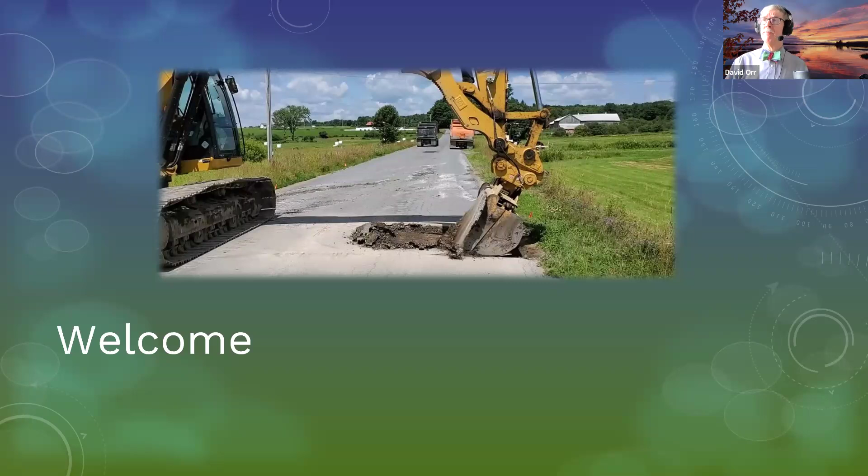Okay. Now, let's do a little bit of a welcome. This helps me see who's on the call and allows me to make some minor changes based on what you tell me. So we're going to be using pollev.com/DavidOrrPE. So the first one I like to know is, who do you work for? Town, county, city or village, state or federal, tribal, an MPO, an authority like the Thruway Authority. You're a consulting engineer, you're a contractor, or you're just working for a living. So today we actually have a nice variety. We have state and fed, cities and villages, towns, counties, contractor even. Good variety today. And quite a few who are working for a living. Okay.

What do you do for those agencies? Are you an administrator? Are you the deputy or highway superintendent or the commissioner? In other words, you're supposed to be in charge. Are you the engineer? You in the field crew? You're a board member? Or none of the above. If you do that, throw that into the Q&A. And by the way, you can access the poll via the web. You don't have to have the app on your phone. But again, you can always put the answers in there. So we have mostly engineers. I'm not surprised by that, but quite a variety of folks for the remainder. Okay.

And again, if you ever do a none of the above, put in the Q&A what the none of the above stands for. How long have you been in your current position? Is it less than a year, all the way up to 20 plus years, just to get a sense? Oh, we got a few who've only been in their jobs for just under 3 months. That's interesting. Okay. Wow, good variety.

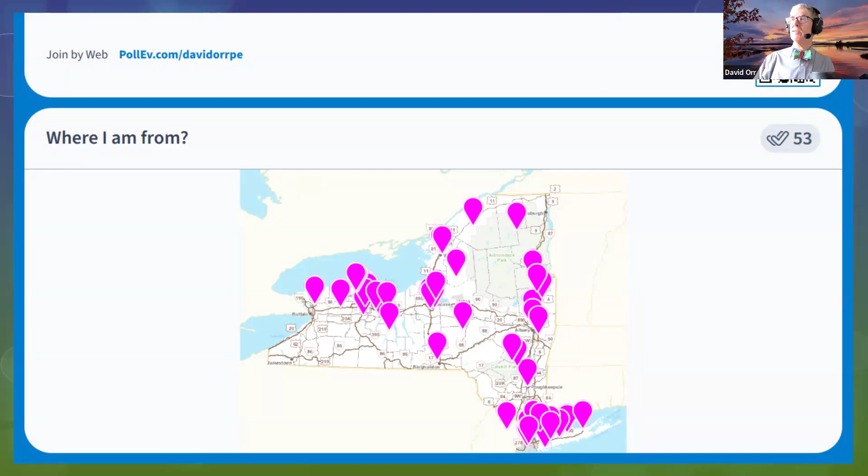Okay, so let's answer a question. We've asked this question before, but it's always a useful one. Why do we build roads and streets? I'm just curious. Why do you think we build roads and streets? We can talk about this for lots of classes, including safety classes that you put in.

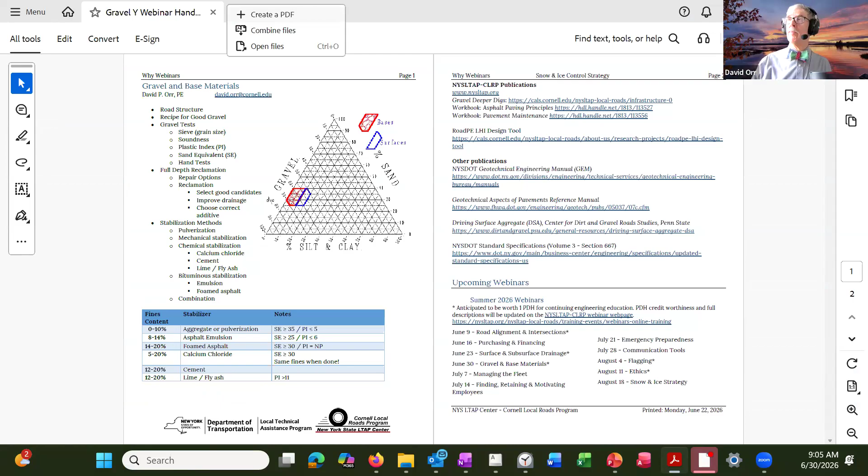Okay, so why we build roads and streets, I think we can all agree upon. But really, when we think about it, roads and streets, you have to think about the traffic on the road, the structure of the road, and the geometry. Now, we're not going to talk much about the geometric alignment today. We might talk a little bit about width, but mainly we're going to be talking about the traffic and the structure that goes on that roadway.

Because, as one of our former circuit riders at Cornell used to say, you need to build the road to handle the load. And a lot of that comes from the material that we are talking about today, base and gravel materials, because roads actually do have a structure to them, ranging from the surface all the way down to the native material that we build on, the subgrade, i.e. the material after we've stripped off the organics.

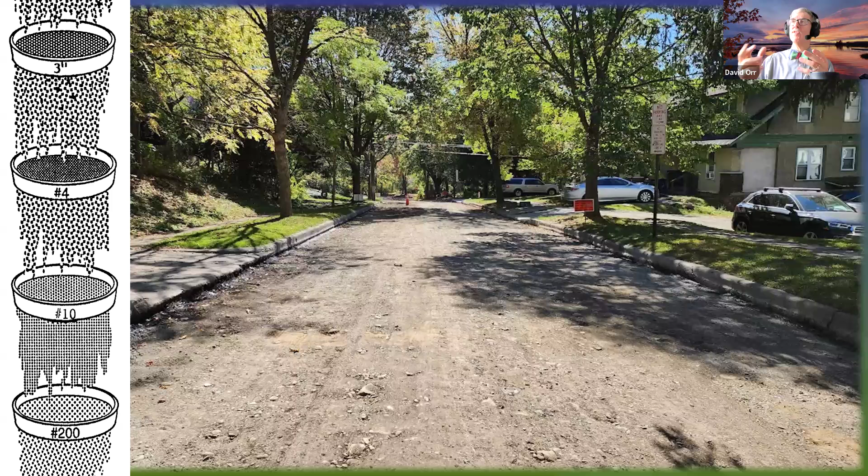Okay? And there are different definitions for what people use. I want to make sure we're all on the same page. So let me ask you this. This is a picture here in the city of Ithaca where they had milled off the surface. They were getting ready to repave after they had ripped off all of the asphalt. There's no asphalt left. If you've done that on your roadway, you've got this material exposed. What do you call that material? What is the name you use for the unbound material under the surface?

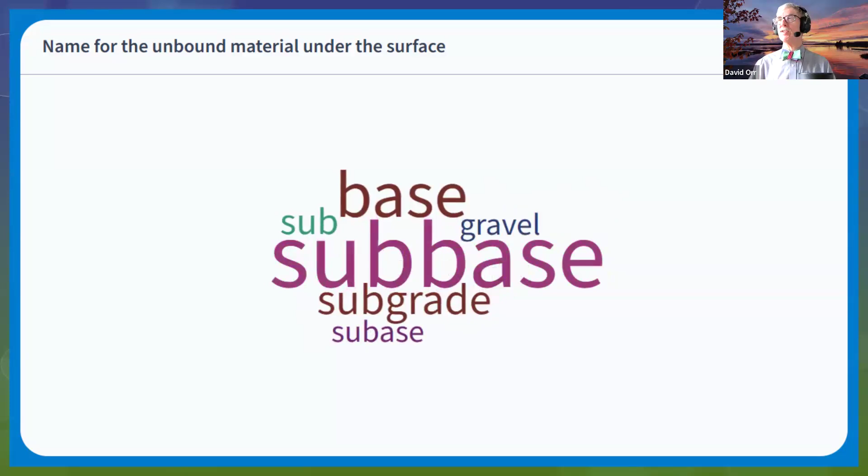Okay. So let's see. Sub-base. Base. Depends how thick your road is, what you call that. It might be a base, it might be a sub-base. Some bases are bound materials. Okay. Anybody use other terms that are more specific? I can tell I'm talking with more engineers because of the answers you're giving. Some people say the term gravel. You might hear the term crusher run, bank material, lots of different words people use for it.

Okay. Now, for some people, the surface of the roadway is unpaved. So I told you I'm going to ask you to raise your hand. Raise your hand if you are with an agency and you have unpaved roadways, gravel or earth surfaces, or if you're an engineering firm and you work with those kind of roadways. Just trying to get a sense of how many of you deal with unpaved roadways on a regular basis. I'm guessing it's not going to be a lot today, but that's okay.

Okay. Now, we're going to come back to this unpaved road here in a little bit because that's actually pretty important. But let's remind ourselves of what we're trying to do when we build a roadway. Vehicle comes along, truck's doing most of the damage. We know about that. But we're trying to spread the load out so we don't overstress the subgrade. And so we put a pavement on top. Okay? And that spreading the load out means the subgrade is protected, but the pavement then has to pick up some of the forces from the tire.

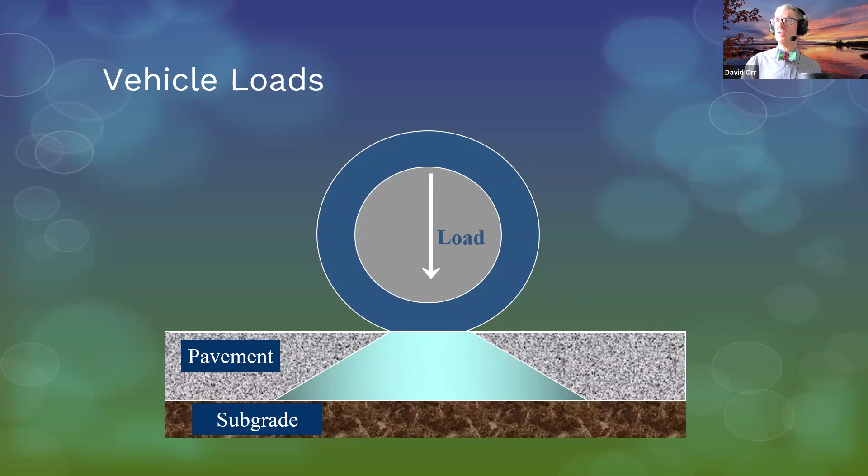And what we really look at in a lot of cases is the deflection of the roadway as it bends, goes up and down as the loads go by. Okay? Now I can illustrate this better with a video. This is video shot by the U.S. Forest Service. You can actually see the pavement move. Watch the two green dots. It makes it a little easier to see.

And these are a road designed to fail. This was done by the U.S. Forest Service, as I said. And you can see high water table, a little dirty in terms of the material, a very thin surface. And so it only takes 81 passes of these fully loaded dual tandem trucks to destroy this pavement. Now, if this was your own road, you'd be having a bad day. In this case, it was actually designed well because they wanted it to fail as part of a research project, looking at the effects of materials and water and all that fun stuff.

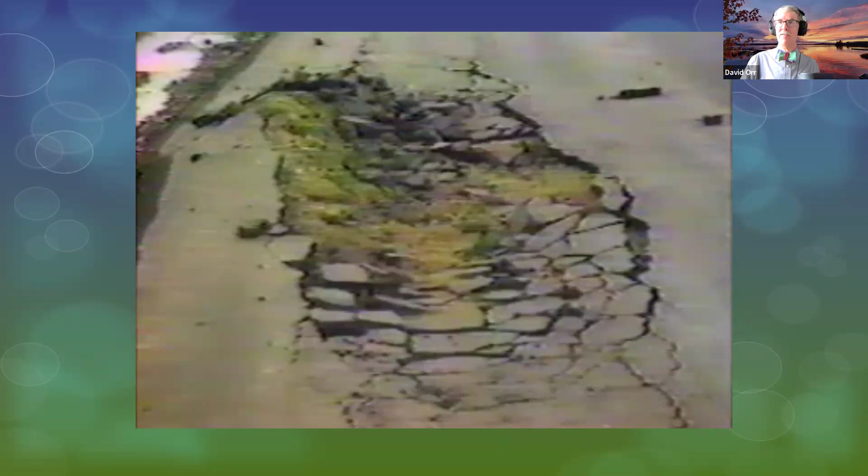But this is why different people use different terms. If you're on a state highway, you're going to have a series of layers. You're going to have a surface layer, which is some kind of Superpave or its kin, and all that fun stuff that are out there, and probably warm mix these days. You're going to call that surface material. You might have a binder layer. You might have a base layer of asphalt, but it's all bound materials before you get to a subbase, which is unbound. Okay. And that subbase is relatively thick. We'll talk about thicknesses in a little bit. And this is the roadway over the top of the subgrade.

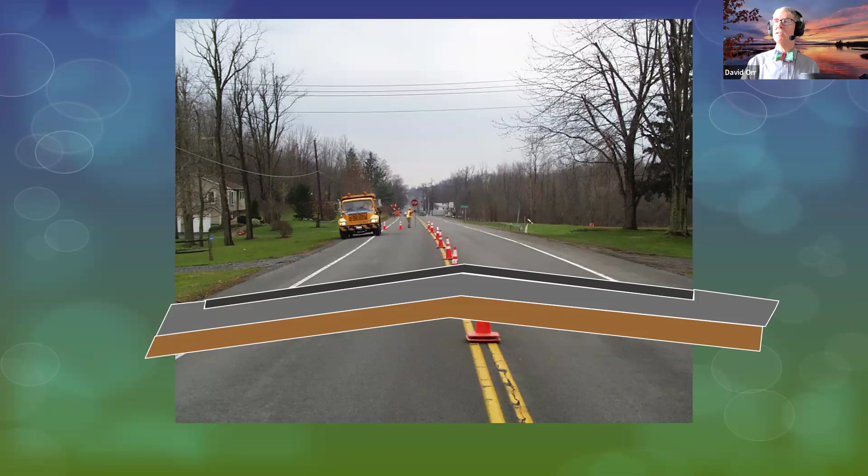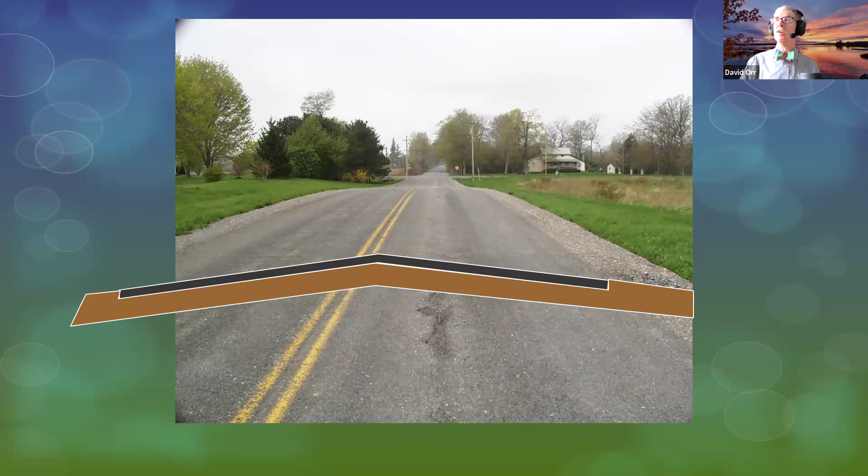If you're on a collector road, maybe a county road is a common example of that. In this case, you might have an asphalt layer or two over a base layer, which is unbound. Okay. So in that particular case, the base is actually more critical for the structure, because it's doing more of the structural capacity work. And of course, if you're on a town road, it might just have a chip seal on it. And that chip seal might have been placed on an old gravel road. It might have been placed as part of an upgrade, but you can actually have a pretty good road with just a chip sealed surface.

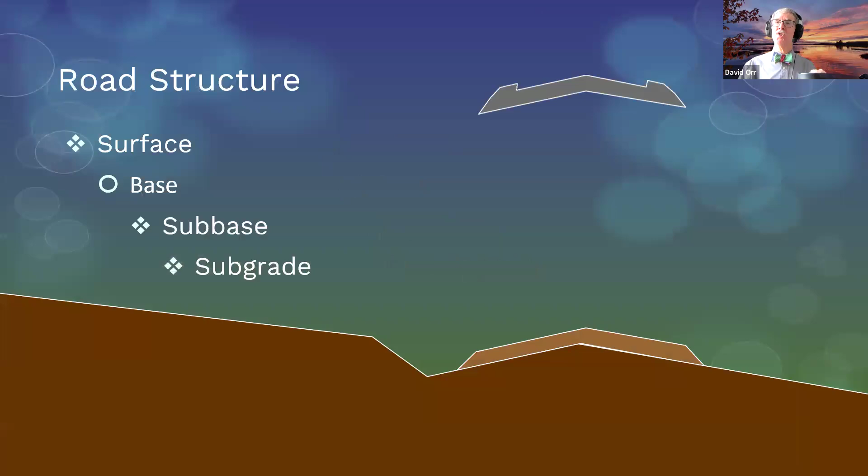And of course, a lot of roads, almost everything but the interstate system, started as unpaved outside of cities. And so in that case, you've just got a gravel surface. And the quality of that gravel, obviously, as you get thinner and thinner surfaces, becomes more and more critical. So when we're looking at that road structure, what we're going to be talking about today is the unbound layer and why that's such a critical layer when it comes to having our roadways last as long as possible. It might be a base. It could even be a surface. A lot of cases, it's a subbase, but we're talking about that base layer that's over the subgrade.

Now, again, this helps me, but also gets you thinking a little bit, I hope. If I was asking you for your agency, or if you're from a consulting firm, the kind of roads you work on the most, what would you say is the most common asphalt thickness? Unpaved roads, less than 2 inches, 2 to 4 inches, 4 to 6 inches, 6 to 8, or greater than 8 inches.

Okay, let's see what y'all come up with here. And I'll come get my mouse and scroll down so we can see. And I didn't think we have many unpaved. Okay. So 2 to 4 is the most common. This is the center of our curve, but quite a few of you have 8 or more inches. And what that means is that asphalt's doing a lot of the work.

Okay. Now, if you've got a paved roadway, okay, this is important, paved. So if you look at the bottom left, you'll see the word paved. If you have a paved roadway, what is the thickness of the gravel layer? Could be a base, it could be a subbase, but this is above the subgrade. This is material that is brought in to make that road stronger. Is it 0 to 6, 6 to 12, 12 to 18, 18 to 24, or greater than 24 inches?

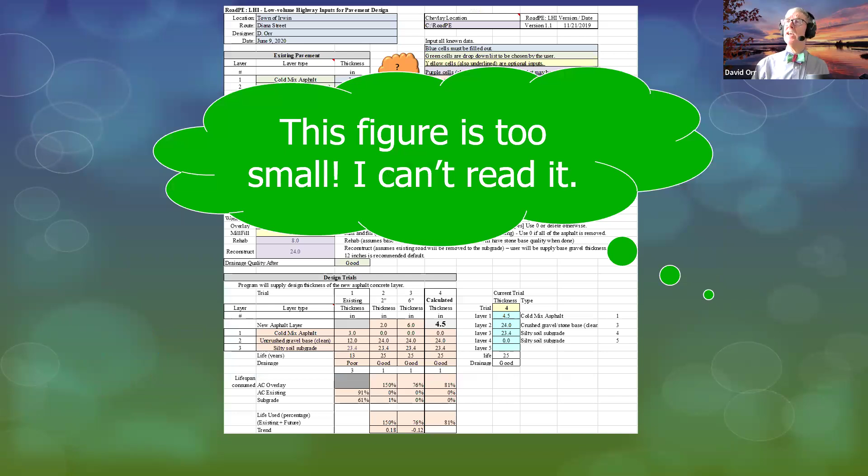We do have a tool available. We call it Road PE LHI. The LHI, I set the acronym to stand for Low Volume Highway Inputs. It's actually the initials of our former director, Lynn Howard Irwin. But if you're interested, it's available. It uses a spreadsheet, which means it's probably not as fast as it could be. And I know you're going, the figure's too small, I can't read it. That's okay. I just want you to see there, if you're interested, there's a tool to do modern mechanistic design for pavements that involves a spreadsheet that works up to about 2,000 vehicles a day. It's not really going to work on the higher volume, but you can run the numbers to get you in the ballpark.

And the idea behind any pavement design is you first have to check the existing pavement. Whether you're using AASHTO 93, you're using the tool we put together, or using the modern AASHTO ME design, you really have to check the existing. And someone says, is it in our asset management program? It's not. It's a separate link. It's in the handout. Could we integrate them? We'd have to think about how that might work. But the idea is you got to check the existing.

Because I've seen people, they run a design and they go, oh, we got plenty of structure, not realizing they've already lost a lot of the life of the pavement because pavements fail in fatigue. Then you run your design using whatever's there and decide, hey, do I have to start over? Can I just recycle? Do I have to do a rehab or what do I have to do? And of course, any tool you use should allow you to tweak, just do a single check, and any good tool should have that. If it doesn't, you might want to think about looking at another tool.

And we don't do enough design. We should do more. But if you think about it, you probably should have a tool that can do a design about the time it takes you to wander over, get your coffee cup, and come back. And that's a good rule of thumb. If it's longer than that, it's probably something you're not going to do much. But we do need to design our pavements to handle the loads because there is a road structure involved.

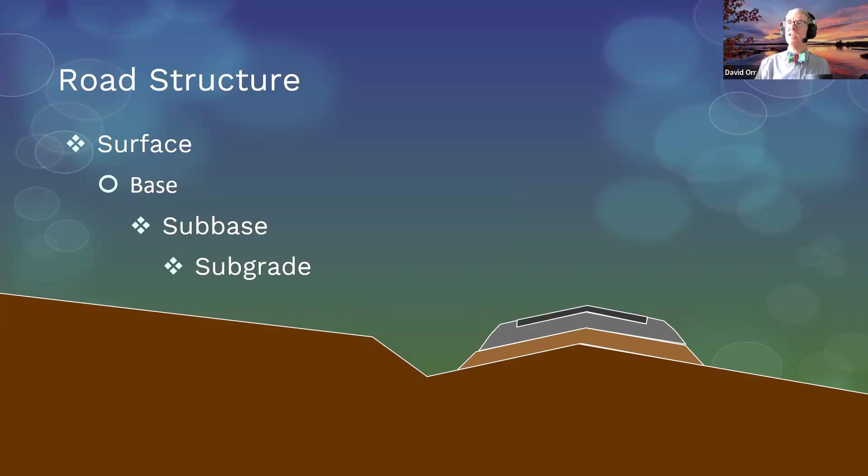Okay. But what I want to make sure we're on the same page on is how do we get that good gravel layer, that subbase, base, whatever we call it. We want to have good gravel. And it can make a huge difference in the life of our roadway if we've got good gravel. You can run the numbers, but it could be a factor of 2 in terms of lifespan by improving the drainage. And part of that means having good gravel. So what's the recipe for good gravel? Well, you need lots of drainage. You've got to be able to drain the material. Okay? You've got to have the correct mix of gravel, and you're going to have to do some testing, whether you like it or not. Okay?

Now, I've got a question over in the Q&A. I like to see questions. It says, how is the issue of very infrequent heavy trucks addressed? A new development residential street only accommodates heavy dump trucks during construction, but not after build-out of the development.

The way you do that is you account for it in a short-term design, because the cool thing is for pavement design, they fail in fatigue, and you can actually sum up the percentage of pavement loss during the development. There's actually a way to do that if you're interested.

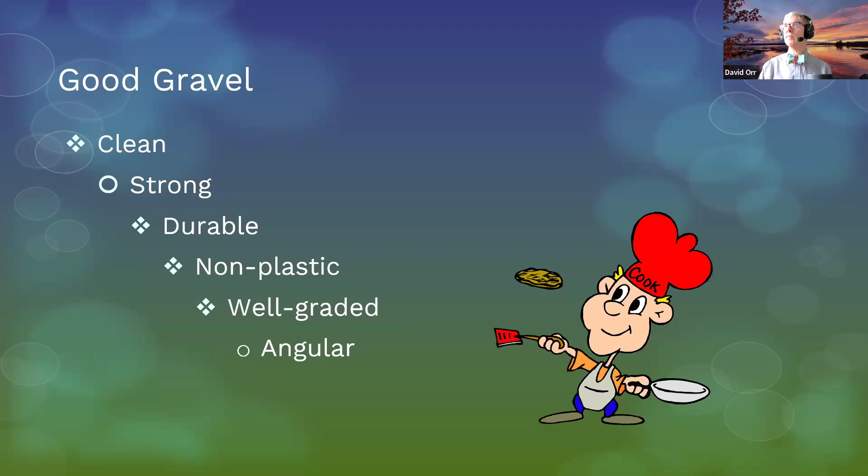And I put that last mainly because if you gave me all of the others, but I couldn't get angular for a base gravel that's under asphalt, I'll live without an angular material. I can make it work as long as it's not just completely rounded. But if I've got great angular material that's dirty, it doesn't matter. It's still going to have problems. So let's go through the more critical ones here and talk about what that means.

So what do I mean by clean? Well, gravel, of course, or base or sub-base, whatever you want to call it, is actually a mixture of particles of different sizes. The gravel-sized particles, the larger things, is where the strength comes from. That's where you're going to have your strength of the roadway. It's got to be durable and handle everything. Then you're going to have some sand in the mix. That sand fills in the voids, still pretty good for drainage. And that's all you need. You don't need anything else.

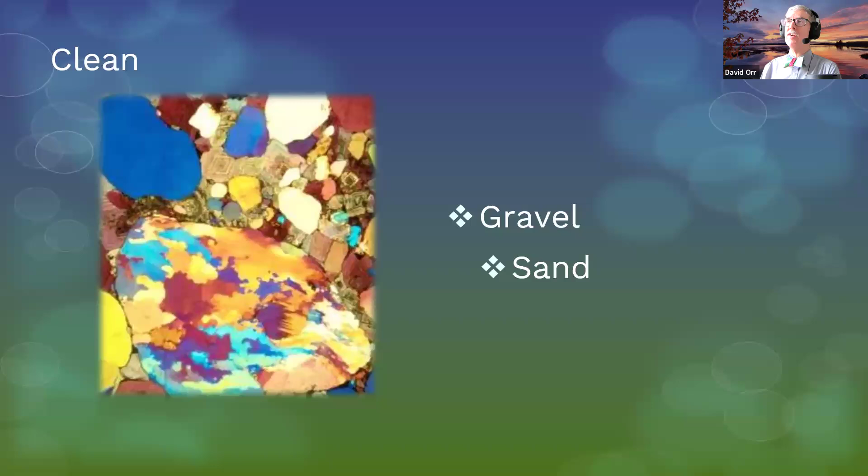But the reality is, since we're using native materials in the area mostly, you're going to have some fines, like it or not, some silt and clay. Okay? So you're going to have some fines. So what I'm going to show you here is a chart that we've shared. It's on the handout in a different color schema. And what essentially we did, long before I was here, our original director, Jim Spencer, got samples of gravel from every county in New York State.

So glacial tills mostly. Not completely, but mostly. And found good gravels and bad gravels, started looking at the features and what makes good gravel, what makes poor gravel. And then over the years, Lynn Irwin tweaked it a little bit. I've done some tweaking. We've looked at other specs from other places like the Pennsylvania Dirt and Gravel Roads Group and other LTAP centers and other standards like the U.S. Forest Service.

And what we found pretty consistently is you need about 50 to 70% gravel. That's where the strength comes from. That's the durability. And in terms of the mix of sizes that you put in, you've got to have that dense gradation to it. There's a little bit more, but in 1 hour, we can only sort of give you the range.

There has to be a range of gravel sizes, up to no more than 3 inches, maybe even a little smaller on a surface gravel, down to sand size, that 1/4 inch cutoff point. Sand, you need about 25 to 40% sand size to fill in the voids, help it pack, and it's still pretty good from a drainage standpoint. That's true wherever it is in the pavement, okay? If you've got too much gravel, it's not as stable. If you have too much sand, you don't have enough strength. So you need that good mix.

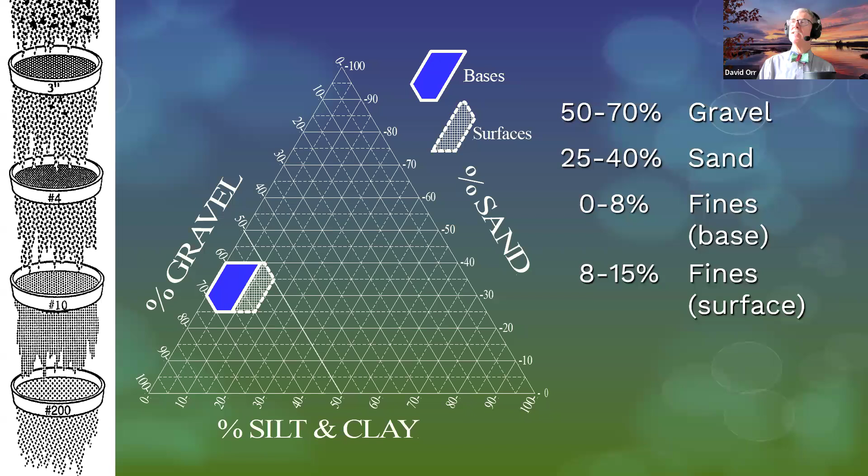Now, if your roadway looks like this, you probably did pretty good. Your base is probably pretty clean if you've got good drainage. But the problem is, if you just chip seal or pave over a gravel surface, it's probably in that hatched zone. It probably has, just by time and default and what we know works, material that's got a fines content that's a little bit too high for having a chip seal or pavement on it. And what happens is water that used to evaporate builds up in spring thaw periods, and we get problems.

Okay, so here was a gravel road. It had been gravel for a long time. It got chip sealed and it blew itself apart. Not because of the ditch, not because of the slope, because of the quality of the gravel. The gravel, when it was tested, had a fines content of 13%. Well, at 13%, it held too much water. As a gravel surface, fairly low traffic, but you chip seal it, you don't clean that gravel up first, you're going to have problems.

And by the way, if you're wondering why the 8%, what we found is up to about 8%, especially with silts, which are really common in New York State, is not too weak in the spring and it doesn't have frost effects too much. This is a good example of what happens in the winter. As it freezes, if it's got a lot of silt and there's water available, the roadway will heave. Because you know and I know the road stripe was not placed with a dip already in it. Probably paved pretty smooth in the summer, but in the winter, you can find the culvert, it doesn't move.

Anything above about 8%, we start to see frost issues, which is one of the reasons, by the way, we are concerned when people are using what everybody likes to use, item 4, which technically is type 4 from a state spec. That's actually a sub-base material. But if it's close to the surface, those frost issues can get you in big trouble. So we really want to have relatively clean material if we can.

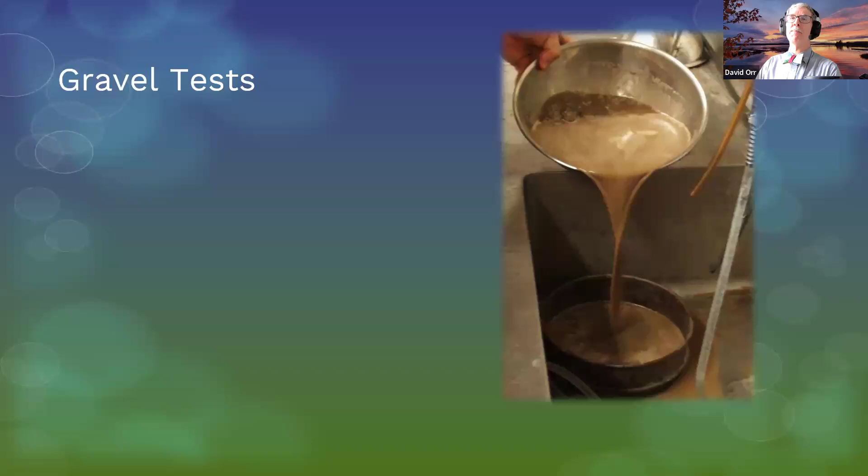Here's a picture of the wash portion of a sieve test, which breaks down the particle sizes. Okay, that's a critical test. We all did that for those of us who went to college and took geotechnical engineering. You all remember your soils class and you did a sieve test. The wash is really important to get that number right.

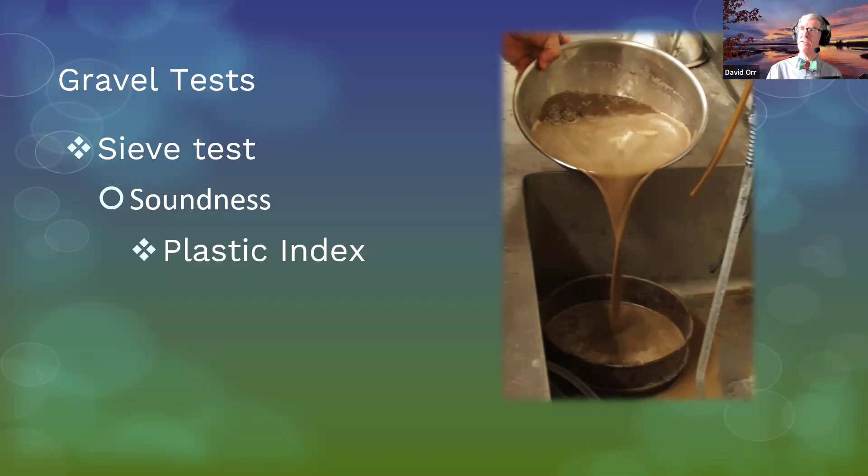Another test we do is called soundness. Okay, and I'll come back and talk about soundness in a little bit more, but soundness means how does it handle freezing and thawing and freezing and thawing? Okay. The plastic index, and again, we'll talk about this one a little bit more, and that's how plastic this material is. How does it behave in the presence of water? Okay. And there's a test I want to talk about called the sand equivalent, and that's related to the plastic index, and we'll talk about that more.

There are other tests, and if we had a whole day, we might talk about other tests, like there's a test to check for durability called the LA Rattler test, where you take the material and you put it in a big dryer and you spin it around with steel balls and see how it breaks down. And that's an important test to do, but you probably know most of the good materials, the things that are going to hold up under traffic. And there's some hand tests you can do to help get you started.

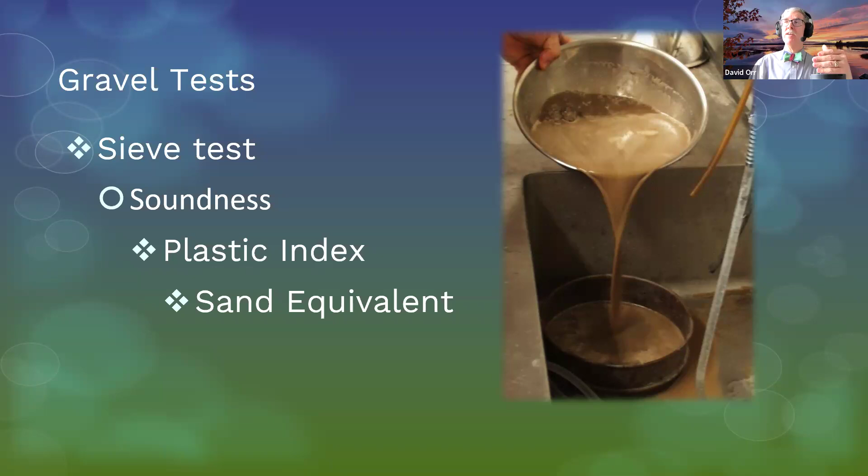But let's look at these four. Actually, we're going to look at three of them. The sieve test is one we all should be doing. We should do that on all of our aggregates, whether they're gravel, base, sub-base, or even asphalt and concrete. We should be doing sieve tests.

What is the soundness test? Well, if you've got a material that is not sound, what happens is it freezes and thaws, water gets in, and it breaks it apart. And that could be because it's a weak stone, like a shale. Okay. It could also be because it's a conglomerate. It's a material that's only held together by some light cementation. Okay. And it looks okay to the eye and it seems to do okay. But then when it freezes and thaws, it breaks apart. The Catskills are filled with materials with poor soundness.

And you could do this with water baths, where you put the rocks in the water, take them out, freeze them, thaw them, put them back in the water, back and forth. It's expensive, it takes longer, takes more energy. And so what they've done is they said, well, we can make crystals. We can make crystals relatively cheaply. And we'll do that with Epsom salts. It's called magnesium sulfate, but the same Epsom salts that your grandmother uses on her feet is the same stuff.

We take a saturated bath of Epsom salts, we drop the rocks into it, let it soak, bring it out, and then heat it up. And as you heat it up, the crystals form, the same crystals in the other direction when you freeze it and make it colder. And you'll get a breakdown of the rocks. And it's got to be able to handle a certain number of cycles depending where it is in the pavement. And if it breaks down too much, it's not sound.

And that's a test that you should be testing. If you're buying state-approved materials, they're doing that test for you. Okay? The other one is the plasticity index, how plastic it is.

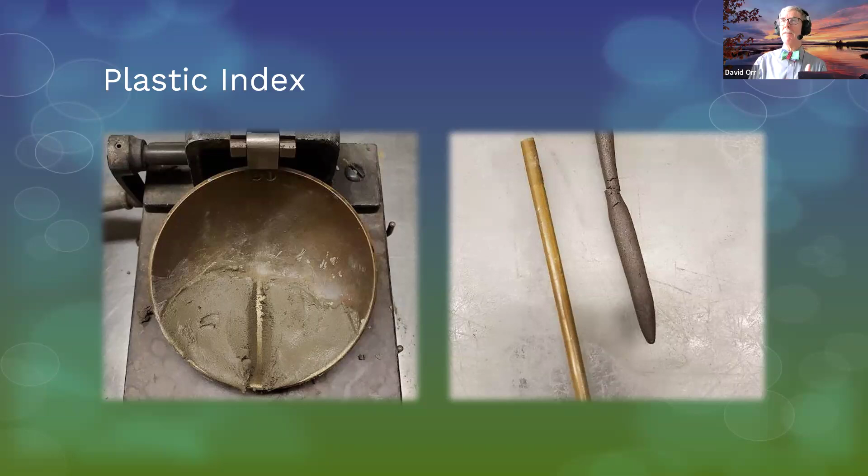But with clays, that range can be pretty broad. There are materials in Texas that have been tested and have a moisture content range for when they're plastic of upwards of 400%. And boy, they hold a lot of water. I'm glad we don't have to deal with those kind of materials in New York. And if you're from Texas, you do know about expansive clays. But the plastic index is a great test for when you've got a lot of clays, especially what are called heavy clays.

But I want to introduce you to another test if you don't know about it called the sand equivalent. Do me a favor, raise your hand if you've heard of the sand equivalent test. Let's see how many of you have heard of it. If you ever dealt with Superpave asphalt, when it first came out especially, the sand equivalent was actually one of the tests they did on the aggregate. Okay, so just a few of you. It's a pretty cool test. It's actually one we recommend, and we'll talk about why in just a little bit. It's essentially an alternative to the plastic index.

What you do is you take material in a specific solution that's calcium chloride, which causes it to flocculate, and some glycerin, and you essentially shake the heck out of it. It's like the old mason jar test, where you put the gravel in a mason jar, shake it with some water and let it sit on a shelf overnight. This is a scientific version of that. You shake the stuff that is smaller than the number 4 sieve, i.e. the sand size stuff, let it settle out for about 20 minutes, and measure the height of the column.

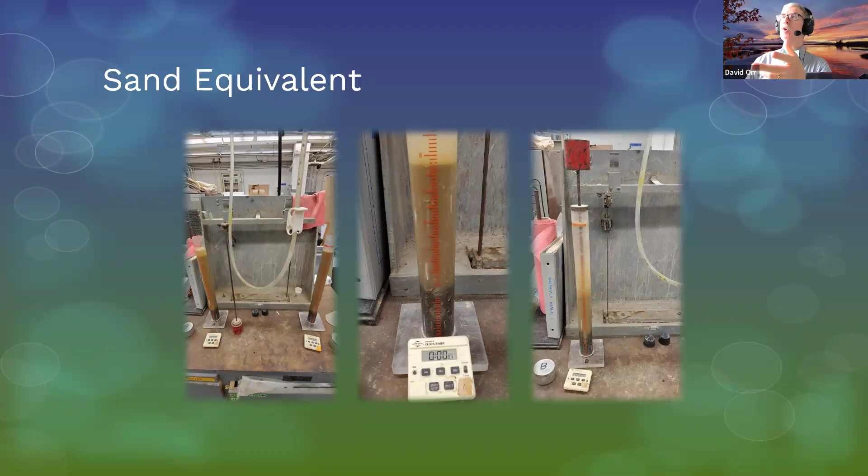Anything that's sand sized and larger is going to fall out immediately. Anything finer than that, the silts and the clays, are going to slowly settle. Timing matters; you measure the height of the column after 20 minutes of settling. What you get is a ratio of the total height of the column to the portion that will support weight. You actually put a weight on it. So you take your clay reading and your sand reading, the part that will support weight, and do a ratio with the sand on top: sand over clay. That gives you your sand equivalent.

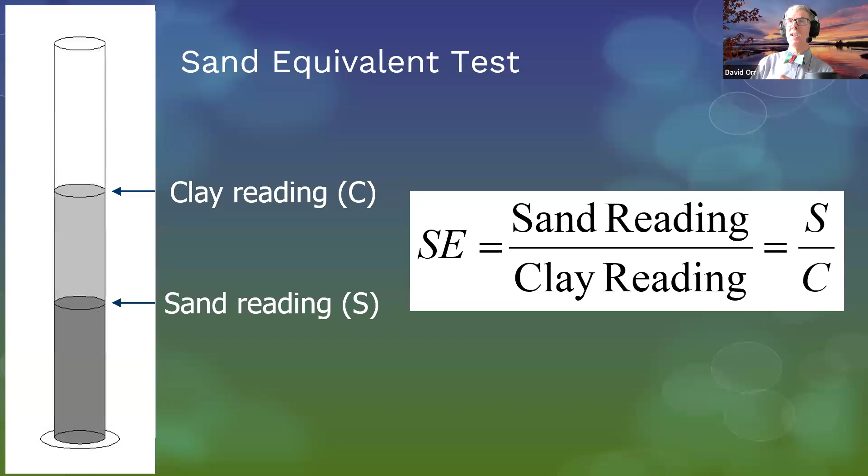So the sand equivalent reading comes about by doing this test. It takes about 40 minutes total. You can do it in the lab and get pretty good results within a couple of points. So if I get a clay reading of 7.7 and a sand reading of 3.2, what's the ratio? Get your little calculators out. I know, I'm going to make you do math. What is 3.2 divided by 7.7?

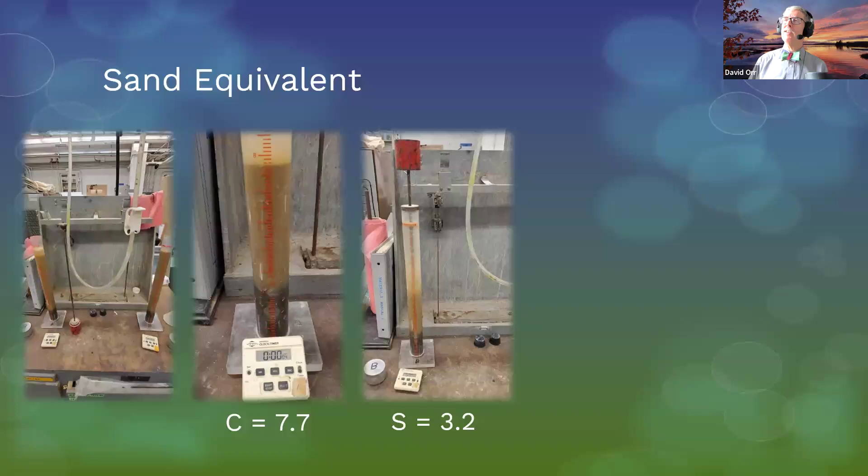Assume that somebody comes up with it in the Q&A. I'm like, he's making me do math. Oh no.

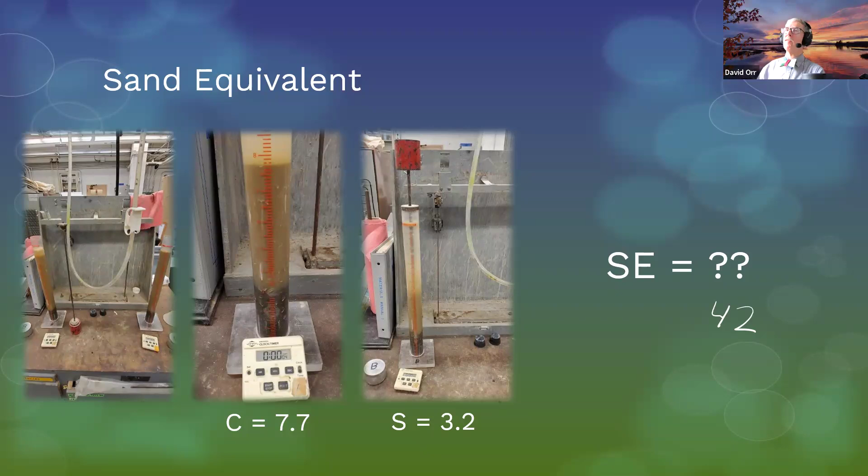.42. We typically report this as a percentage. Okay, so we multiply it by 100 and just take the rounded percentage. So it would actually get reported as 42. We round that number typically. Okay. So yeah, it's 42 for sand equivalent in this particular case.

What's good about this is why do we like this test? Well, let's look back at our base material. Okay, actually, let's look at the various layers in the pavement. We know the fines content for the surface layer, we'd like 8 to 15%. For the base layer, we'd like it even cleaner. If it's close to the surface, we'd like that fines down to 5%. And again, we'll allow up to about 8% if it's deep enough in the pavement.

The sand equivalent needs to be at least 35 to 40 for your base materials, because what that sand equivalent is measuring is the clay-like fraction that exists. Now, for a surface gravel, you don't want it too high because it's a measure of how does it behave? Does it hold enough water to help bind everything? Now, you could use plasticity instead, and the plasticity surprisingly matches up relatively close to the fines content, 0 to 5 and 0 to 8, until you start running a bunch of these tests.

And if you've run a bunch of plasticity tests, you and I all know that once you start getting plasticity down under 10, especially, it's really hard to tell them apart. It's a very nuanced test. I could get 10 of you into a lab and we test material that's got a plasticity of 6. Some of you will say it's non-plastic. Some of you will say it has a plasticity of 10. It'll be a wide range. For low plastic materials, the plastic index is not a very sensitive test.

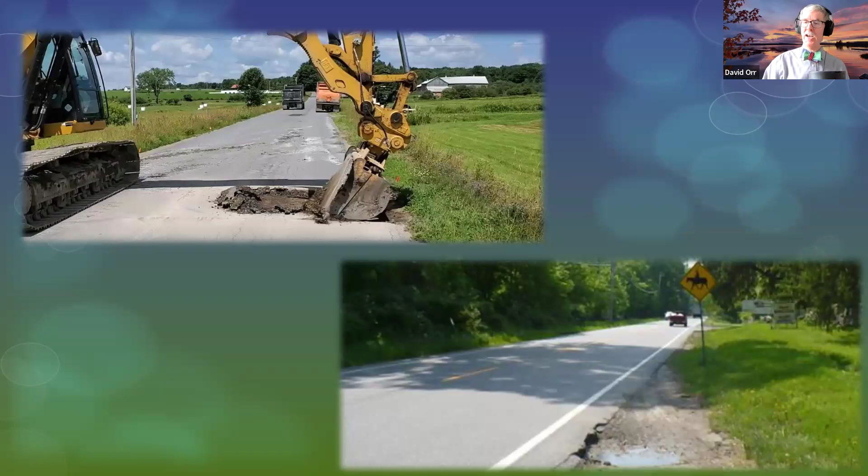And why do I think that's important? Well, we've done testing over the years. There's a site in Lewis County where we did some testing. In both of these sites, the materials are non-plastic. So by that test, you'd say, oh, these are great materials. Now, in the case of the one in Lewis County, the sand equivalent value was approximately 65. We took several samples and you get a range, but around 65. Pretty good stuff. It's material that's just below the sand size, pretty consistent, actually drains okay, pretty good sand equivalent.

Meanwhile, we did a site down in Westchester County near the John Jay Homestead. It's actually a pretty good place to tour if you ever get a chance. And in that particular case, the sand equivalent was around 8. Okay. Now, the idea is you want a test that tells you something. There's no point in doing a plasticity index test if it's not going to help you learn a little bit.

Now, there is a spec, spec 667, that has surface and base and sub-base gravels in it. It's a little tighter spec, though I did realize when we were setting things up, they've removed the sand equivalent portion from this spec. I need to work on getting that put back in because that sand equivalent is really important when you're talking about low plasticity materials as an alternative. And you may want to think about that.

When I was with Yates County before I came to Cornell, I was warned that somebody was sneaking organics into our pile of material. I caught them with the sand equivalent test over lunch. And we didn't have to pay for that gravel.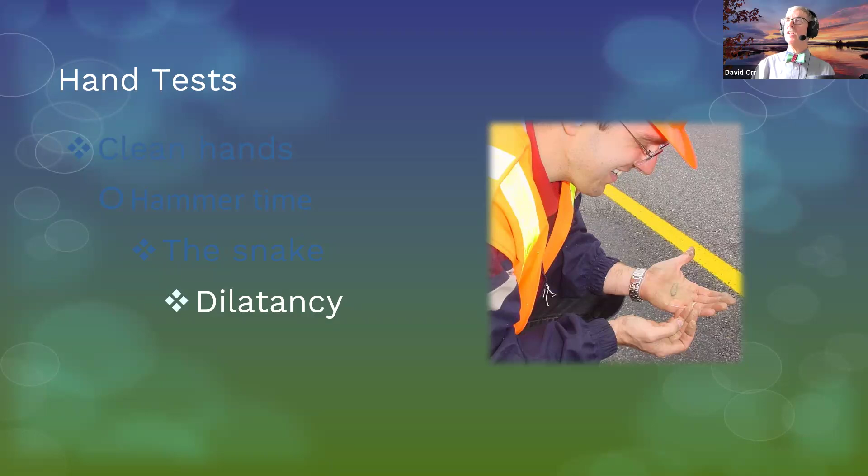And then you take that ball of material that you've got, put it on the shelf in the sun or the dashboard of the truck, and the next day, check the dry strength. Take that little ball, half inch up to an inch max, put it between your fingers and try to break it. And if it breaks and turns into a puff ball, it's probably silt. If it doesn't break at all, or when it does break, it shatters in pieces, it's probably clay.

And these are some simple hand tests to see if something's changed. So if you're doing this test and everything seems to be good and it's puffing and you're like, oh, it's good, and all of a sudden you start getting dry strength, maybe you've hit a different seam of material, and it's a good way to check yourself. Okay.

And of course, stop, look, and listen. You've talked with the contractors, you know who's around, what materials look good, and what materials you probably want to avoid and maybe only use as fill. And so stop, look, and listen can be a very, very valuable thing to do.

Okay. So we've talked about gravel. We want our gravel to be in that blue zone. Okay. We'd really like it to be there. That's optimum. If we had a gravel surface, it's probably a little dirtier. But we know a lot of times the material just doesn't fit. It's outside of anywhere in that hash zone, or it's in the hash, and we want to get it into the blue. So I want to make sure we talk a little bit about how we take those materials and get them cleaner without having to go find new sources, because that can be difficult to do.

And so we're going to introduce FDR, and that's not Franklin Delano Roosevelt. It's full depth reclamation. Okay. Reclamation needs to be part of your overall treatment plan. And so, for instance, if you have asphalt surfaced roadways, it's going to be one of your options towards the end of your list. Everybody should have something in this list. Doing nothing, by the way, is my favorite repair alternative, and you're all doing it right now. And of course, drainage is pretty important. Okay. We want to try to avoid reconstruction because we know it's expensive. But we're going to talk about reclamation. And by the way, when I say recycling, I'm just talking about the bound layers on the top.

I got a question in the Q&A. How would high organic material change the behavior of the materials in the hand test? First off, we don't want organics. Organics in the roadway are usually a really bad idea. We try to remove those organics or at least keep them deep if we have to go over a swamp. But organics can, over time, settle and have problems. We don't want organics. What it does, by the way, in the hand test, it acts sort of like clay.

But by the way, in the case of organics, you take it and you smell it. You can actually smell if it's got a strong organic component. And there are some lab tests if you've got any suspicions where essentially you heat it up in different ways. And if it differs in terms of how it degrades when you heat it up at a lower temperature versus a higher temperature, you can actually check for the organics. But yeah, we don't want to have organics.

And do you get liquefaction of base material under heavy traffic? In a swampy area, you can. Okay. You can, if you've got a dirty material, you can get liquefaction.

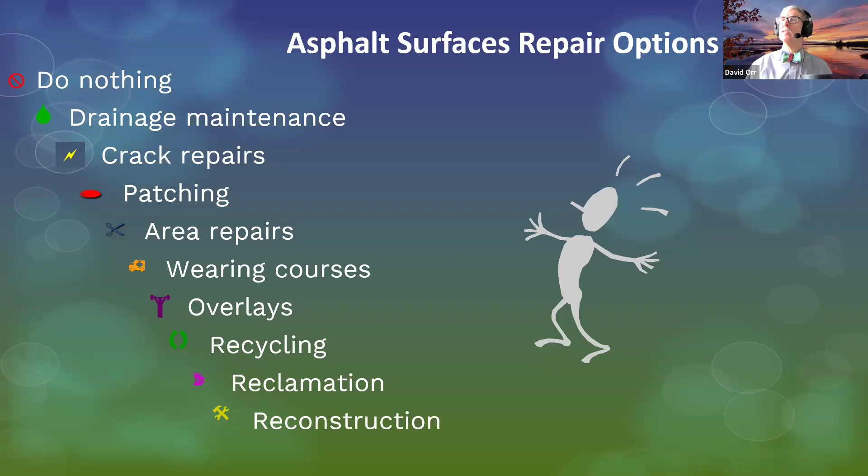But vibration is going to lead to liquefaction almost as much as the weight will. But you can get liquefaction, especially in spring thaw, when you've got a frozen layer with liquid above the top of it. Okay. So let's talk a little bit about that reclamation stuff.

Oh, went the wrong way.

Okay. Now I like reclamation because you have an almost new road when you're done. Because you're repairing the base. You're taking your asphalt surface, if you've got one, you're mixing it with the existing gravel to a limited depth, and you've got a new base. So it can be very cost effective. It does have limitations. It can be a challenge when you have utilities, but it really can be very effective.

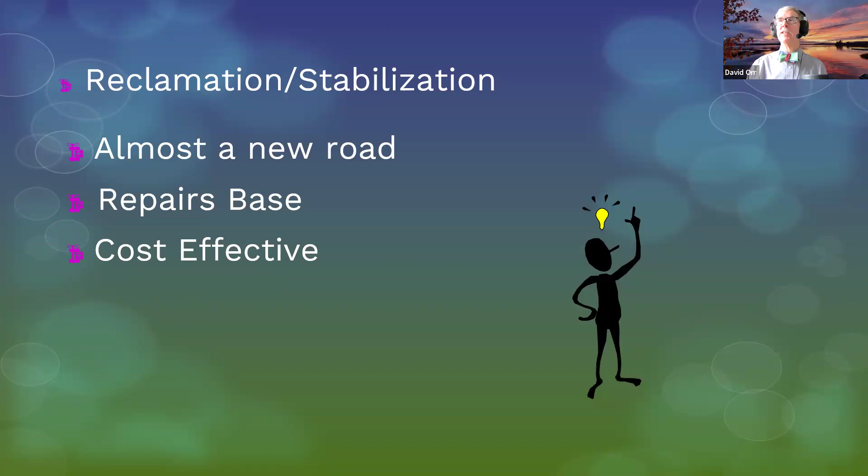And the key is you're trying to turn what's there into a good gravel base or sub base, depending on what you're going to be putting on top. And so what that means is you got to pick good candidates. You got to find roads where you can stabilize it. If it's too far outside that hashed area, you can't get it into the hashed area, no matter what you do. You've got to look at the drainage. Anything we do has to include the drainage.

And there are lots of different ways to make it in that blue zone. You got to choose the correct additive to get it into the blue zone or into the good base gravel zone. And remember, most of our roads started as unpaved roadways. So keep that in mind. Most of our roads started as unpaved roads.

Now, I'm going to ask you to raise your hand. Come on, computer, wake up. There we go. I want you to raise your hand if you think this is a good candidate for reclamation. Reclamation was not a good candidate, by the way, for crack repairs. And someone put they did a reclamation project and it worked well. Yeah, I'm a big fan if you choose good candidates. So raise your hand if you think this is a good candidate for reclamation. Okay, so a few of you have.

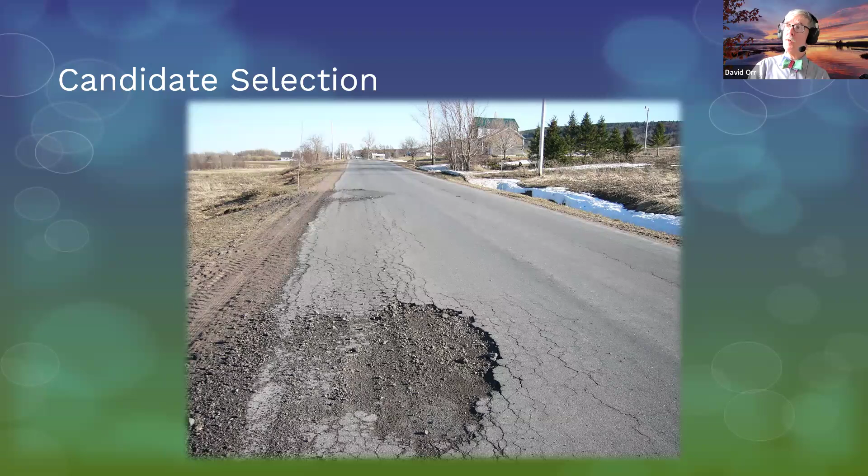So I'm a huge fan. You got to do a pit. You can do a core, you can do a small hole, you can even do a full test pit like we did on a project for our highway school for a demonstration project. One test is worth 1,000 expert opinions. And you may find the material is so far away, you can't get it into the zone.

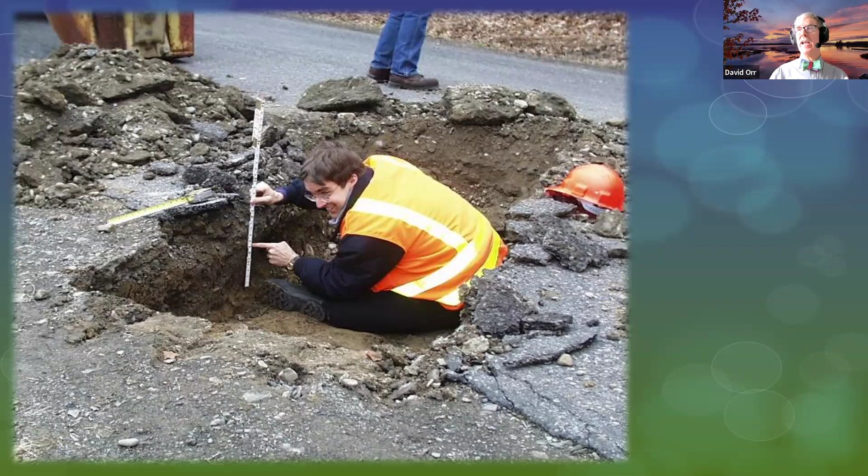If we go back and look at our chart, I'm going to change colors. I'm going to do yellow just so it shows up a little bit better. If I've got a material that has got a lot of silt and clay, it's up in the 40% range. Even adding cement, it's going to be really hard to get it all the way down into here if we're targeting the middle of that zone.

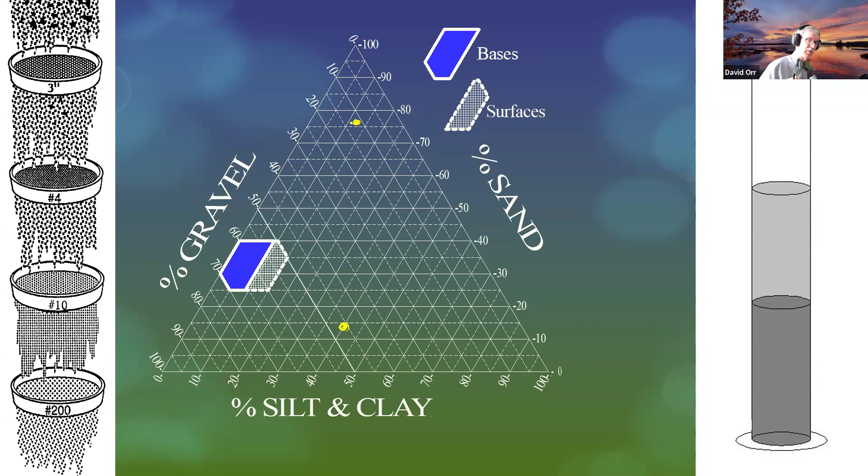And if we got a material that's got a lot of sand, it's going to be really hard to bind enough of that up. And you might go, well, we could mix some rocks with it. But if you think about it, and I didn't grab my straight edge, but my phone will act as a straight edge, hopefully.

If we draw a straight line between where we are and where we'd like to be, you can only add aggregates in such a way that it's on that straight line, and you can only bind up so much. So you really did need to do a test. And so the test I would always recommend is you do a sieve test and you do the sand equivalent test. You might be able to do plasticity, and let's talk about that just a little bit.

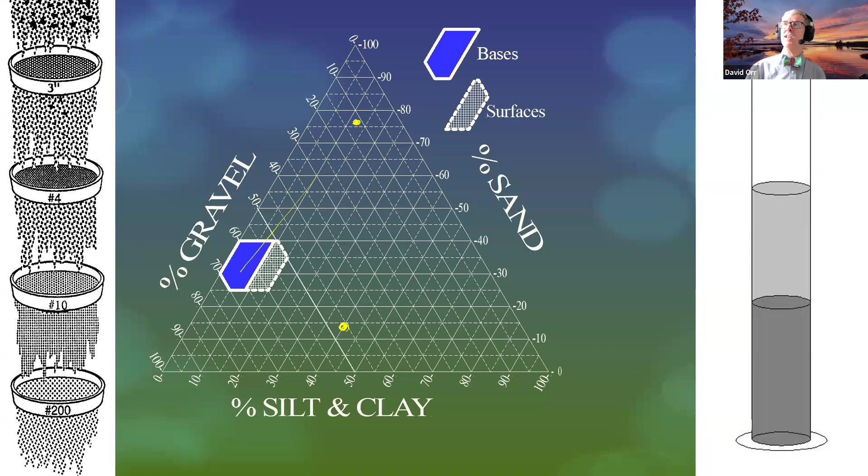So how can we do this? Well, we could pulverize what's there. This actually is very effective in a lot of cases. It's all you got to do. You got an old beat up asphalt surface, you got a dirty base, you just blend the two together. The asphalt doesn't tend to have a lot of fines after you're done, and you just blend it together, and that becomes your new base.

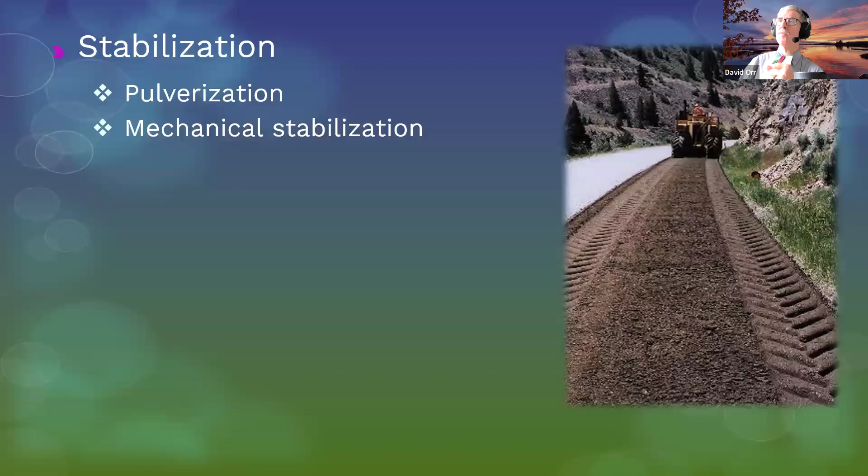You could bring in aggregate, and they call that mechanical stabilization, where you bring in extra aggregate and blend it all together to get the fines content where you need it to be. You can use chemicals to bind everything together. That could be calcium chloride, cement, and lime fly ash. I'll talk about those a little bit more here in a minute.

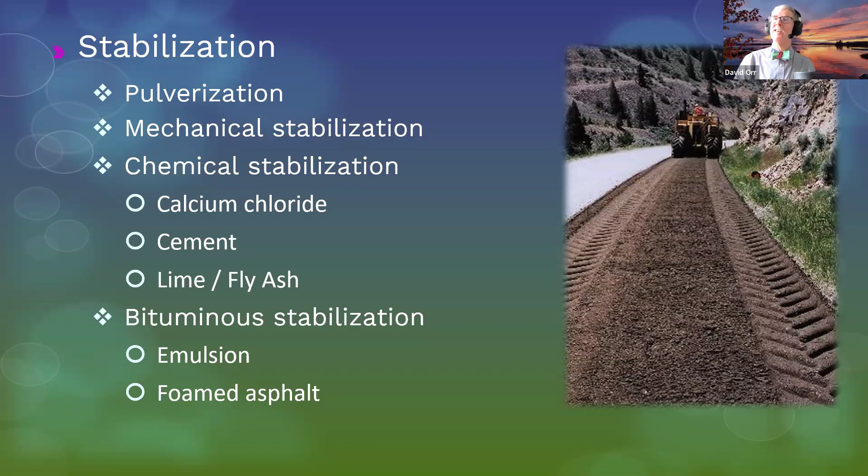Or you can use asphalt or bituminous stabilization. And that asphalt can just be a straight emulsion, or you could even foam it like you used to do with milk in elementary school where you took your straw. Same concept. And of course, a combination is very common. A lot of times, for instance, we'll add a little bit of cement to bituminous to help speed up the process.

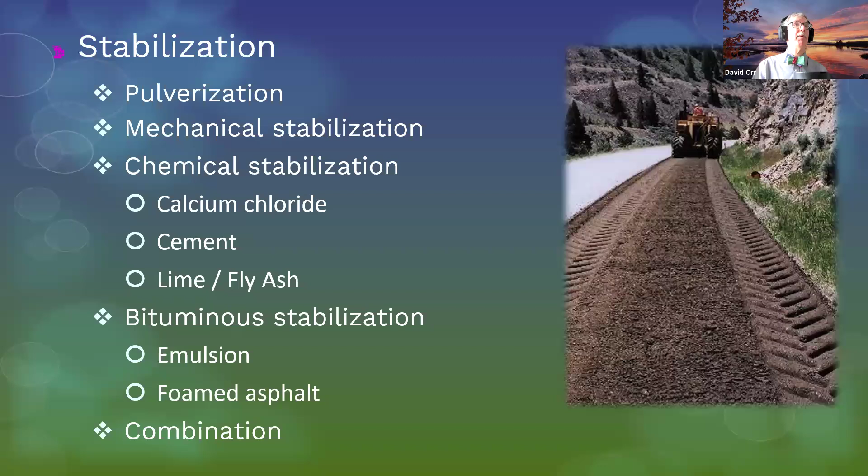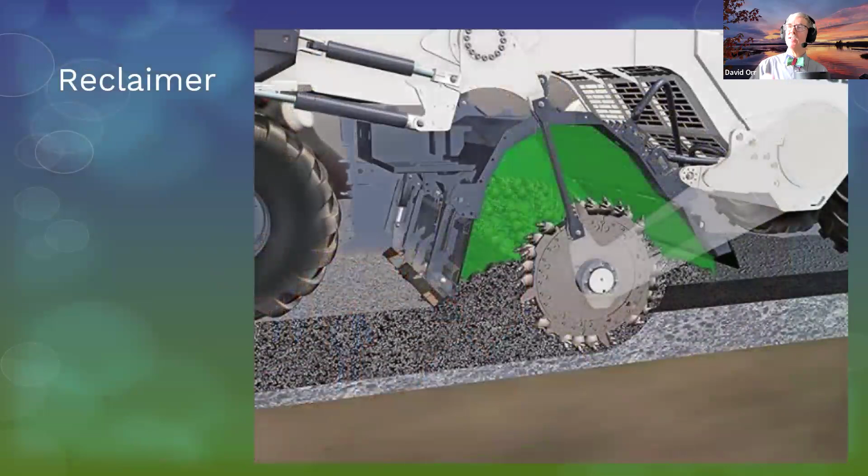And can it be effective? Absolutely. So here's a project we did for highway school. This is the one we did the test pit, and they're doing cement stabilization. In fact, here's a picture of Lynn Irwin, he's the old director. And if you were to actually be able to look inside the reclamation machine, you've got a spinning disc that's cutting the asphalt, and there are downcut and upcut machines. And if we had time, we could talk about which is better. But the key is after it comes out of the back, you now have a stabilized material.

The one thing I want you to take home in our last 7 or 8 minutes together: do not add too much. Whatever chemical you choose, whatever rock you choose, whatever you decide to add, don't add too much. The temptation is to add more. In this particular case, we were doing a cement stabilization project. They added a little bit too much cement because they didn't want to take it home. And what happened was too much cement makes it brittle. It's going to break when it shouldn't.

And if you look here, I'll draw just below it. You can see a line. That line is not a shadow. That line is a crack. And what happened was the asphalt began to crack in spots, and they had to go in and fix the cracks and overlay it rather than just chip seal. And so it cost more than it should have. So don't add too much. So when you look back at your base, again, it depends where you're going to be in the pavement and what you're trying to do.

Now, in terms of choices available, if its fines content is 0 to 10, in other words usually 8 to 10, pulverize what you've already got or bring in some aggregate, you're probably going to be okay. You could probably cheat a little bit, maybe up to 12, 13% with mechanical stabilization. And when you're done, you've got pretty good stuff. You're in the blue. But you got to check to make sure it's low plasticity, preferably close to 0, or better yet, sand equivalent above 35. Because remember, after you're done, it needs to meet the spec for being low plastic or high sand equivalent.

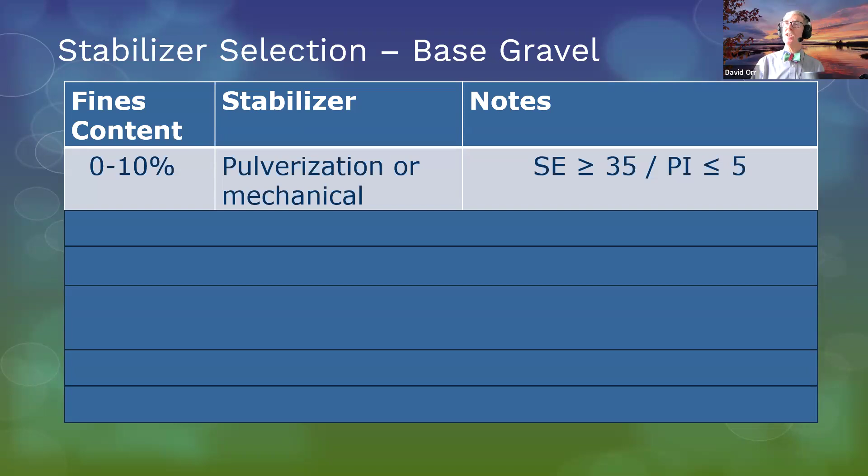You can use asphalt emulsion. Good rule of thumb is about 8 to 14% fines content. Works really well with asphalt. Again, you need at least 25 on the sand equivalent. A little higher might actually help you, but at least 25. And what happens is the asphalt doesn't cement, but it binds up the fines that are in there, the silt and the clay. But if it's got too many fines, or if it's a relatively high plasticity or relatively low sand equivalent, those really small fines can bind up all the asphalt, and you get little globules of asphalt, and they don't actually bind up everything else, and it becomes a mess.

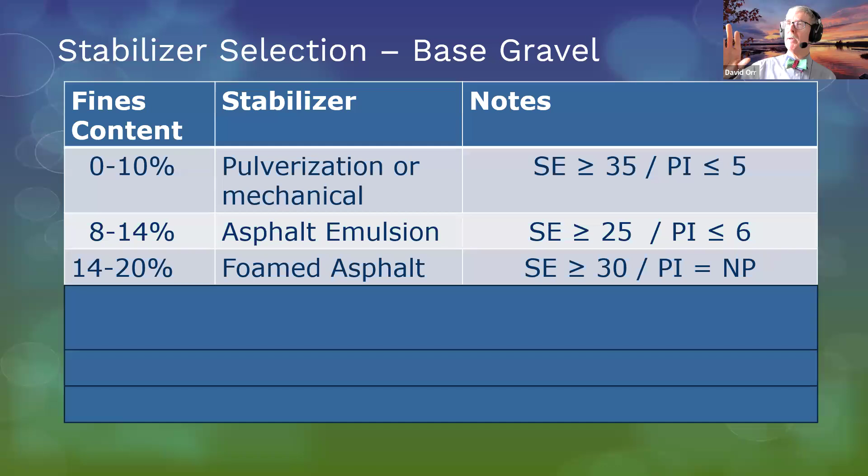So again, you want to test for that. Foamed asphalt, I said 14 to 20 only because I wanted to differentiate. There's obviously overlap here. But again, you can get a little higher percentage fines content, and you are pushing it a little bit at the 20, but you need a little bit better material. Needs a little higher sand equivalent, needs to be completely non-plastic, okay? And you need to do lab tests to confirm all of this before you actually do it.

You could use calcium chloride, a lot of people do, but here's the thing. When you're done, you still have those fines. The fines are still there. All you're doing is reducing the frost susceptibility, and what happens is if you've got a lot of frost, a lot of fines, you can still have problems in the spring. So be aware of that.

Cement works up to 20, even some people go higher. I like to limit it at about 20% just because you can only bind so much, and because of economics. And then you theoretically can use lime and fly ash, but you have to have plasticity in this case. In this case, you don't want the sand equivalent because it's not as sensitive. You need plasticity above 11. A lot of materials in New York State don't have plasticities above 11. So keep these things in mind. And again, if we had longer, we could talk all about stabilizer selection for reclamation, but that's a different webinar.

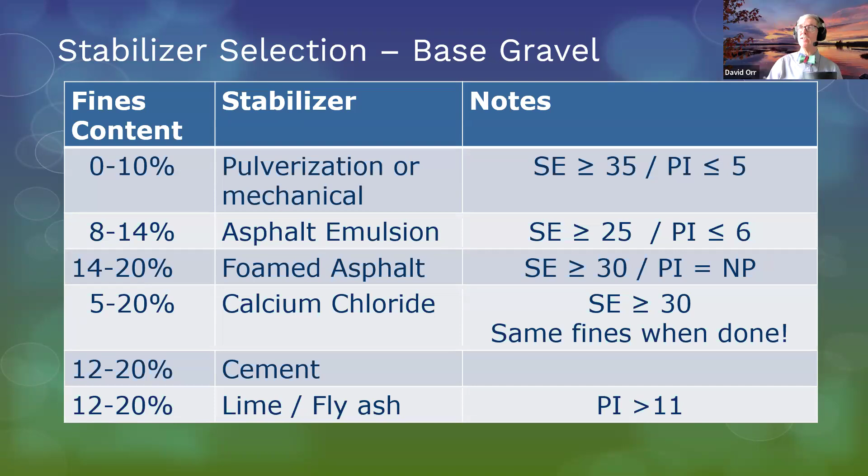Okay, so we're going to do our ending with some PDH questions and hopefully get you thinking. So first off, good gravel surface makes a good gravel base. Is that true or is that false? Very good. Yes, that's false. If you've got a good gravel surface, it's probably got a little bit more fines in it. It's not too dusty, but it doesn't get too soft in the spring. So it's really false. And if you need to, you can put it in the Q&A. In this case, remember, that's what happened. They chip sealed over a road that was a good gravel surface, and it failed because the water couldn't get through the asphalt and it blew it apart.

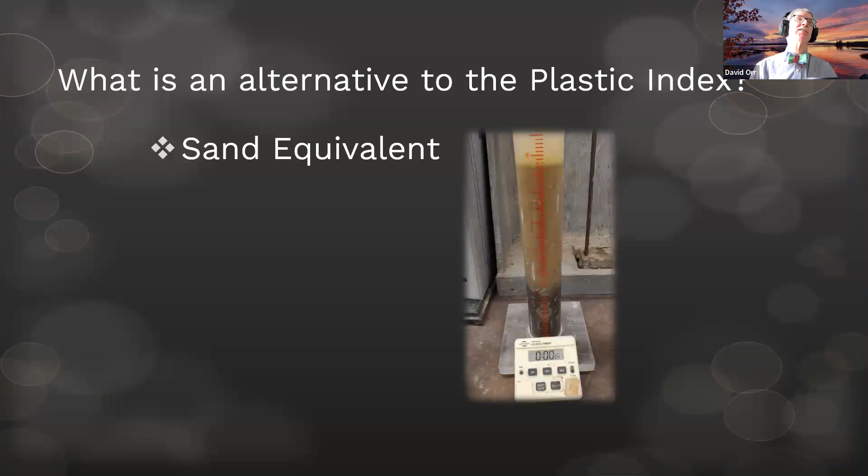What's an alternative to the plasticity index test? Should say plastic index, I apologize. Sand equivalent. Yeah. It's not the sand equivalency, it's a sand equivalent, but it's essentially a ratio. It's the old mason jar test done in a scientific format. And again, it's one of our favorite tests that we think could be used by people.

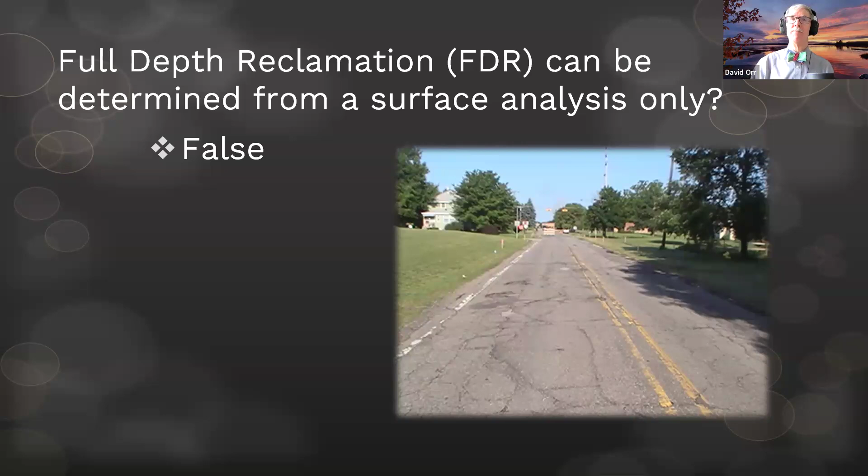FDR stabilizer can be chosen from a surface analysis only. Is that true or false? Ooh, got a little bit more challenging here. You can look at roads and, if you know their history, you can probably say it might be a good candidate. But until you actually do a test pit to know what you've got underneath, you really can't make a final determination of if it is a candidate, and better yet, what stabilizer to use. You need to do a test pit, something to get base gravel and figure out what you're going to have after you get it mixed. Okay? So those are our PDH questions.